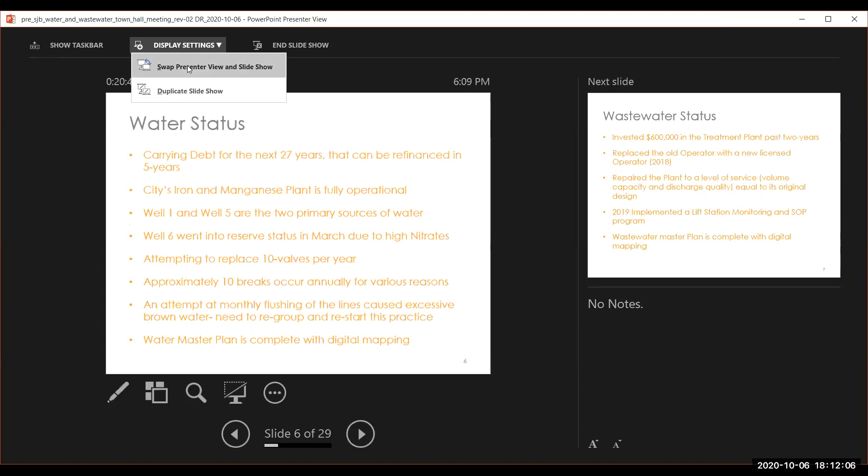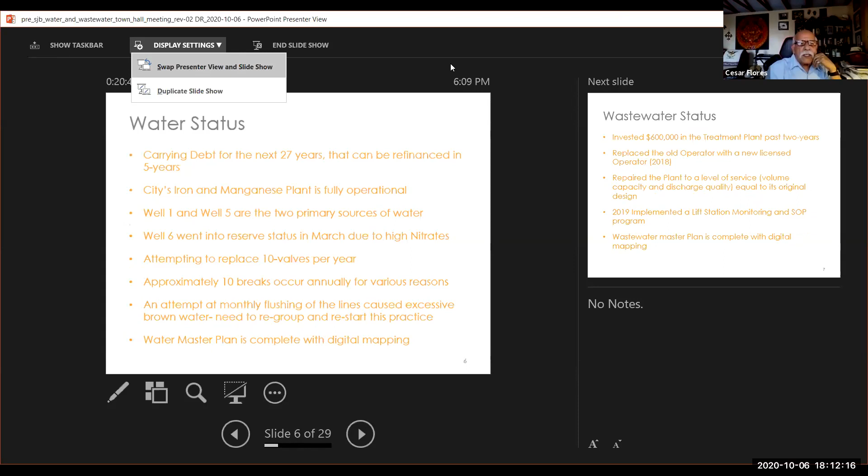Hi, this is Kevin. If you go to display settings at the top, do you see the display settings drop down? Go ahead and click that and swap presenter and slideshow, and that should maximize it for you. It minimized it. Can they see it? I guess they couldn't see it. No, now we see it, barely. Oh yeah, there we go, done.

Is that helpful? Yes, definitely. Good, okay, thank you for speaking up, Cesar. Appreciate it. No problem, I was waiting to check, didn't want to cut you off in the middle.

Well, I got to practice with the maintenance staff this afternoon, so I got this down.

Wastewater status: in the past 2 years, we've invested $600,000, much of that into sludge removal at our wastewater treatment plant. We replaced the old operator with a new licensed operator in 2018, and recently extended their contract. They're doing great work for us, so that's a good relationship we have. We've repaired the plant to a level of service, volume, capacity, and discharge quality equal to the original design, and that was a big goal.

In 2019 we implemented a lift station monitoring program and standard operating procedure program so that our wastewater lines are flushed and we don't have grease backing up in our downtown, et cetera. We've made great improvements there, with a great team working on that. The wastewater master plan is completed, with digital mapping needed to make sure our collection system is being managed effectively.

Before I get into the regulatory framework, I want to thank our maintenance staff. They've been awesome heroes on Labor Day, keeping our wells flowing in the super hot weather. We have a very dedicated maintenance staff, and I wanted to tip my hat to them and their hard work, their teamwork especially.

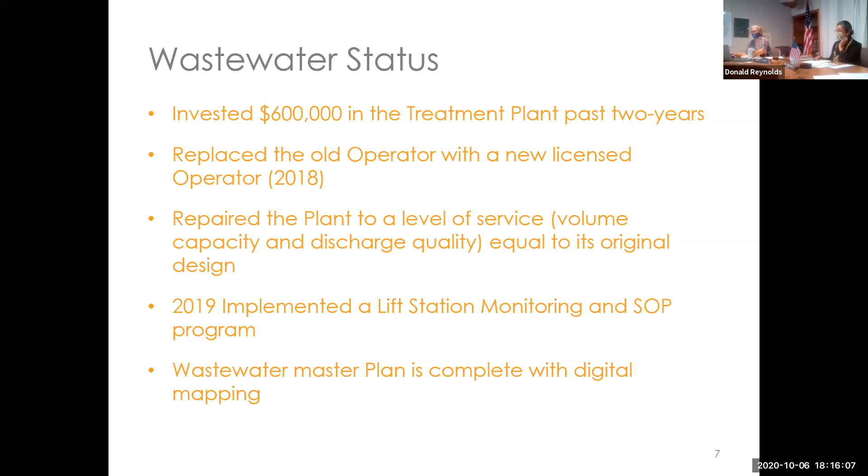And now we're on slide 8, regulatory framework. It's working, okay, thank you for that tip. So now I'm still learning to Zoom after 30 meetings.

Compliance with regulations since 1987, and between 2000 and 2002, particularly since 2007, the wastewater discharge has degraded the water quality in the creek.

I came across yesterday by coincidence a cease and desist order from 2000 where we had exceeded the chloride levels in our discharge into the creek. That's significant because our industrial users did not come on board until 2002. So it's evidence that supports the idea that we were out of compliance before the industrial users came on board.

Nonetheless, we have a lot of work to do with them as far as industrial permits and continued monitoring. So I wanted to make that point.

After making improvements to the plant, only salts remain as a compliance issue - chloride and sodium, and what they refer to as total dissolved solids, TDS. The plant is not designed to remove the salts, and the well water is hard and the source for most of the salt that comes into our system.

So the water is salty as we remove it from the well, from the aquifer, and pump it to our residents. Residents rely on water softeners that discharge salt into our waste stream, and industrial users send very salty water to the city.

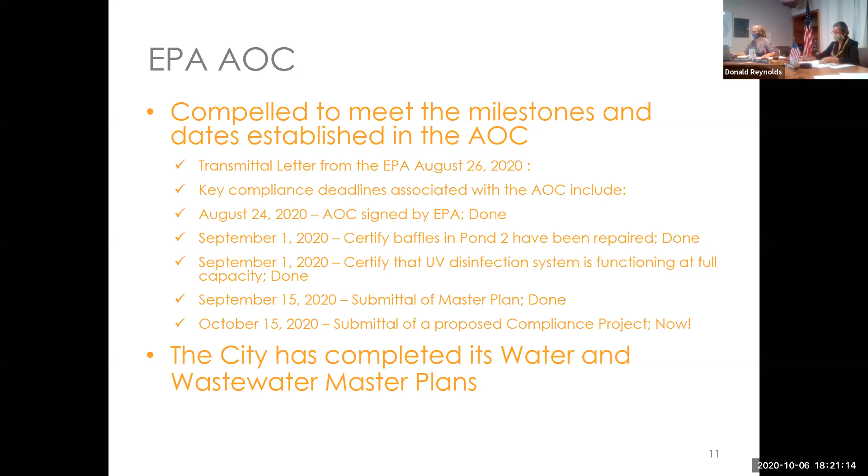So again, we've completed our water and wastewater master plans. So Steve, I think this is where you were going to continue the conversation.

Yeah, sure, that's fine. I was - this was your last slide, but I can finish up here. Okay, yeah, so anyways, as Don mentioned, my name is Steve Beck. I'm a senior principal with Stantec Consulting Services, and we were responsible for looking at these, doing this alternative analysis on what to do about getting the city back into wastewater compliance.

And that kind of grew into not only looking at a solution for wastewater, but also looking at solutions for water for the city also. So part of the compliance strategy was to prepare what's called a preliminary engineering report, or PER.

This is a necessary document required by the United States Department of Agriculture Rural Development Department. We're applying for a grant with them to help pay for some of this project. We're eligible for the grant because San Juan Bautista is considered a disadvantaged community. We're under the median income thresholds for that.

Like Don already mentioned, the city has a 4-part system for compliance. The emphasis here on this discussion tonight is on the 2 parts that need to be fixed: the water source and the treated wastewater, to meet our compliance requirements with our wastewater discharge permit.

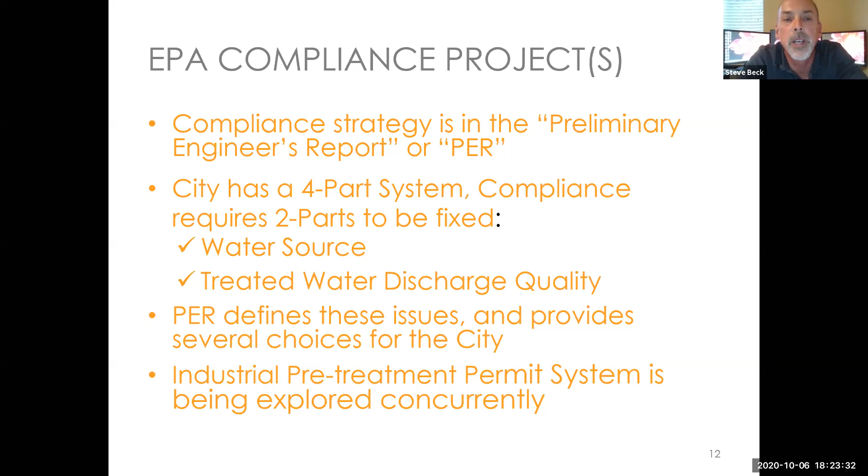The PER document is a very lengthy document, but it defines the issues and provides several alternatives for the city to consider. Along with that, we're also pursuing putting together an industrial pretreatment program to deal with our industrial discharges.

When we talk about salinity or salt, we're really talking about the dissolved minerals in the water - magnesium, potassium, sodium, chlorides and stuff like that. As Don mentioned, the combined concentration of these minerals is referred to as the total dissolved solids, or TDS. For San Juan Bautista, our TDS, sodium and chlorides have very high concentrations in the wastewater.

Unfortunately, our existing wastewater treatment plant does not have the ability to treat these salts, and so they end up getting discharged into the creek. We're currently violating for these 3 constituents. So the question is: providing treatment to remove salts at the wastewater treatment plant can be very expensive, and oftentimes it's more cost effective to try to reduce the salt at the source.

This figure illustrates where the salt is coming from. A significant portion of our salt is in our groundwater, in the water we pump out of the ground - it has a lot of minerals in it that contribute to the TDS. Also, we're in an agricultural area, and the farms are applying fertilizers and stuff, and that leaches into the groundwater. Also our landscaping, the products we put on our landscape, do that too.

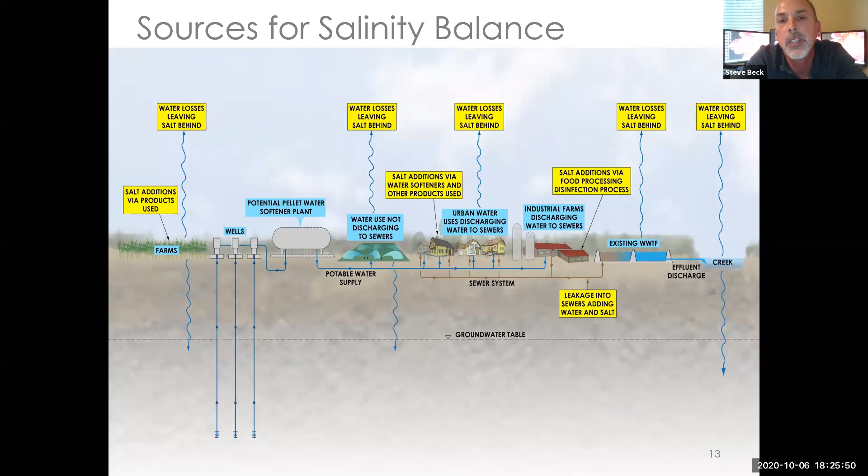But there are other sources of salt too. The food that we eat, the personal care products - those type of items dump salt into the wastewater.

But another source of salt comes from individual, self-regenerating water softeners. As everybody knows, we have very hard groundwater in San Juan Bautista, and so a lot of homes have these self-regenerating water softeners. That contributes a significant amount of salt because it exchanges the constituents - calcium and magnesium - for sodium and chloride, and then that salt gets dumped into the sewer system.

This table shows a salt balance we ran to try to figure out where the salt's coming from, and what concentrations and loadings are involved. You can see the 2 significant contributors are the self-regenerating water softeners and the industrial discharges. The chlorides and sodiums have similar concentrations and loadings. As far as TDS, most of it is coming from our groundwater, but also significant contribution from our industrial dischargers.

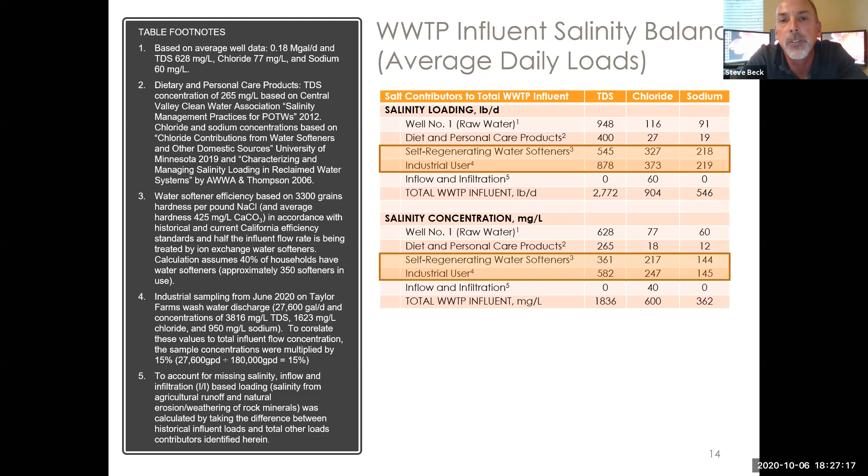Here's a graphic of this. What I wanted to point out is that the industrial contribution to the wastewater treatment plant, on average, our flows are about 15% of the total flow, but the salt loading is much higher - about 30% on average based on the sampling data we collected, and during peak months it can be as much as 50%. So we have a significant contribution from our industrial discharges, but Don made a very important point earlier that eliminating our industrial discharge or reducing the salt doesn't get us completely out of the woods - there are other things we have to do.

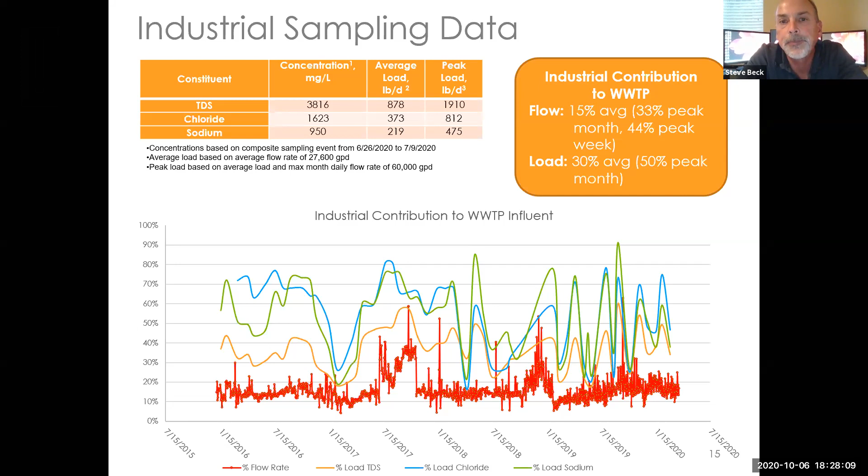So we looked at a number of source control options on this. The first thing we recommend in this report is to do industrial pretreatment and, to the extent possible, reduce the salt load from our industrial discharges. But in addition to that, we also want to look at source control of the salt, and we have a number of options that we looked at in the preliminary engineering report.

The first option, option A, was to look at the pellet water softening plant. A number of years ago, the city purchased a water softening plant, but it was never installed. So we looked at the cost to repair and rehab that and see if that might be a cost-effective way to deal with this. It's important to understand that the water softening plant doesn't solve the salt problem in itself. What it does is provide us with softer water with the hopes that by providing better water quality, we can eliminate the individual water softeners.

Option B, we looked at replacing the self-generating water softeners with cartridge type water softeners. So instead of discharging the salt into the sewer, we would have cartridges that are exchanged periodically. The concern we have with this option, after investigating this and talking to Culligan and other folks that provide these type of cartridge water softeners, is that they rarely see water hardness like we have in San Juan Bautista, and there's a concern that the cartridge exchanges would be very frequent and would make this option somewhat impractical.

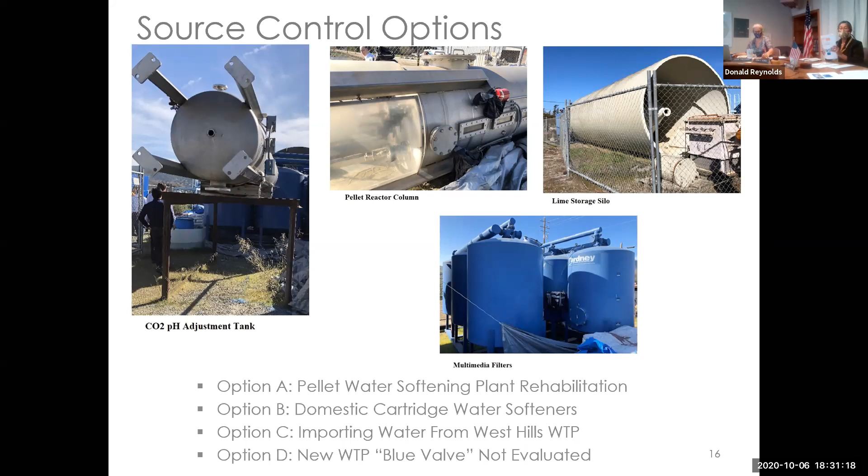Next slide. And also, Steve, Jeff Catano has joined us tonight. So if people have questions about the blue valve and that type of issue, or anything related to the water district, Jeff can help us answer questions as we go.

And so we explored other sources of water and identified, thanks to Jeff over at the Water District, there's an existing well over near Meadowbell Road. So we looked at the water quality of that well. We'd have to get into a purchase agreement for this water from the owner of that well. The water quality is similar to our existing well, so we'd have to provide treatment for iron and manganese removal. So when you add up the cost of constructing the pipeline to that well, treatment for iron and manganese removal, and a rough guess at the O&M cost for purchasing the water from the owner of the well, you end up with a cost. When you compare that with what we call the water security cost, and compare that to the option with the West Hills Water Treatment Plant, you can see that the costs are similar. Option C, the West Hills Water Treatment, is still not the least cost alternative, but there are other factors that need to be taken into consideration, including non-monetary factors.

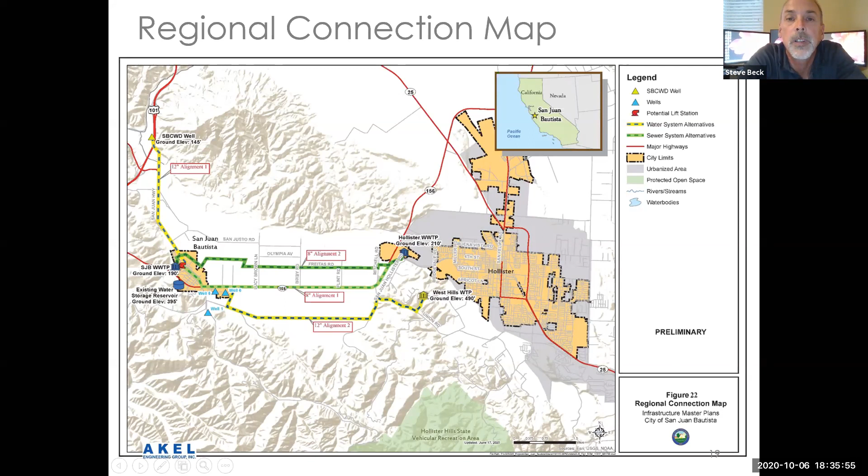Okay, so that's the first part of our investigation. The second part is, now what about wastewater improvements? We looked at 3 alternatives for this. The first alternative had to do with what we have to do as far as on-site wastewater treatment of the existing plant, combined with off-site source control, in this case the preferred option being importing water from the West Hills Water Treatment Plant. What would that take? As Don mentioned, the city had to put a lot of money into the existing treatment plant to keep it operating.

Some problems have been fixed, but there are other problems. The existing plant is at or beyond its published design capacity, so it would be necessary to upgrade this plant regardless. There are a number of issues that the regional board has pointed out about this plant also. So Alternative one would be to upgrade the existing plant with a newer technology membrane bioreactor plant.

This would provide a higher level of treatment, but the MBR plant by itself still is not a full solution for removing salt. It's a solution for upgrading the plant to comply with organic loading and all the other constituents.

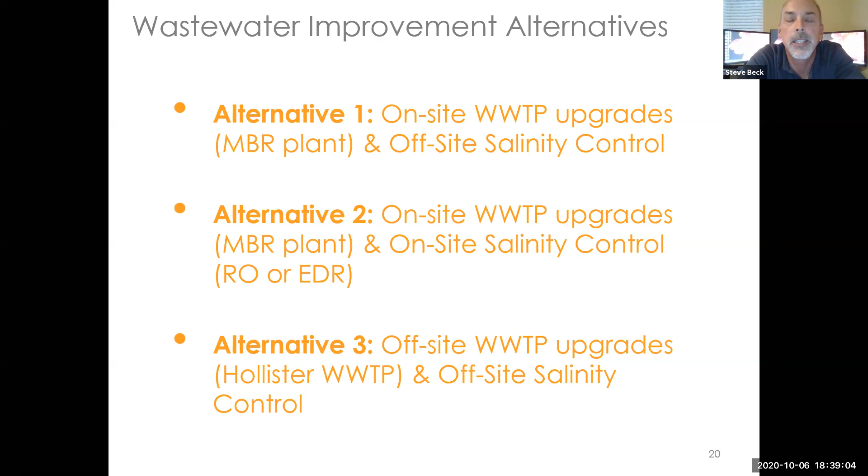Sending water to the Hollister plant and combining with the West Hills, importing water from the West Hills water treatment plant has a higher life cycle cost.

But then when you look at a lot of the intangibles here, the non-monetary costs, Don, if you want to go to the next slide.

There are a lot of other factors with this in addition to life cycle cost. If we were to do a treatment at the existing wastewater treatment plant, we'd have to purchase additional property to deal with the evaporation basin we'd have to build for the salt brine and other things, and that would increase. So there's a factor of footprint, operational simplicity, getting us out of the wastewater treatment business and letting the city of Hollister do that favors that alternative. They have a very robust and reliable plant, and they're likely to continue to comply with future regulations.

So when you factor in these criteria and the relative weighting of these criteria, you come up with a selection of the Hollister wastewater treatment plant and the West Hills water treatment as the recommended alternative in our report.

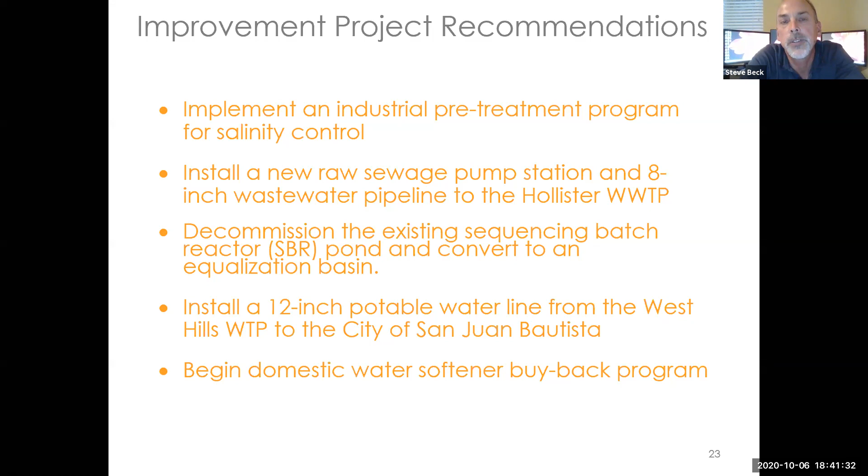And with that, I'll turn it back over to Don to talk about the next steps. Thank you, Steve, that was great. A lot of information to share, it's a complicated topic. But I'm comfortable that we've looked at every viable option. So I hope the public has some questions and comments about that.

But just a few more slides and then we can get to the questions. Okay, the key compliance deadlines associated with the EPA and their AOC consent compliance order.

November 15, 2020, we submitted a schedule for phase 1 of the compliance project. And that also includes a financial plan, and later in our AOC we'll actually conduct a feasibility study. So we'll talk about the feasibility of our plan based on the different resources that we can put together.